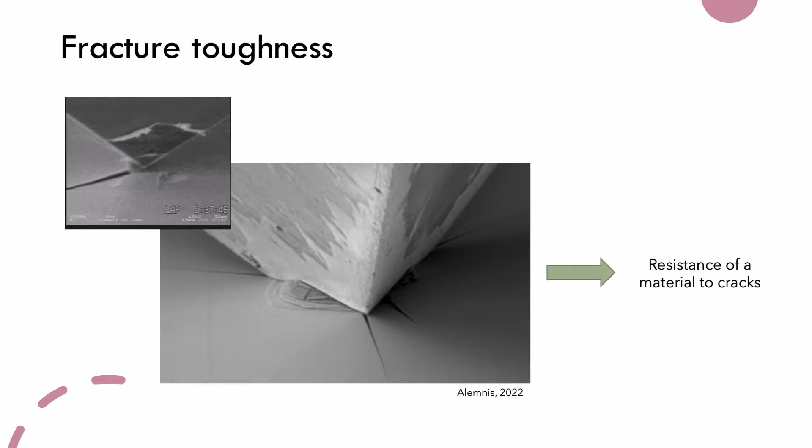Fracture toughness is an essential characteristic of a structural material, indicating the resistance of a material to cracks and governed by the work needed to destroy a biomaterial, also called work of fracture.

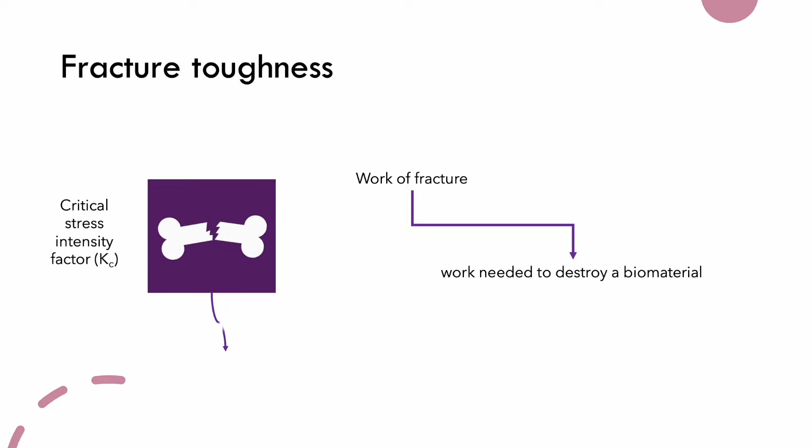The fracture toughness is measured by the critical stress intensity factor, Kc, and critical strain energy release rate, G. The fracture toughness properties of materials vary over a wide range, about 5 orders of magnitude.

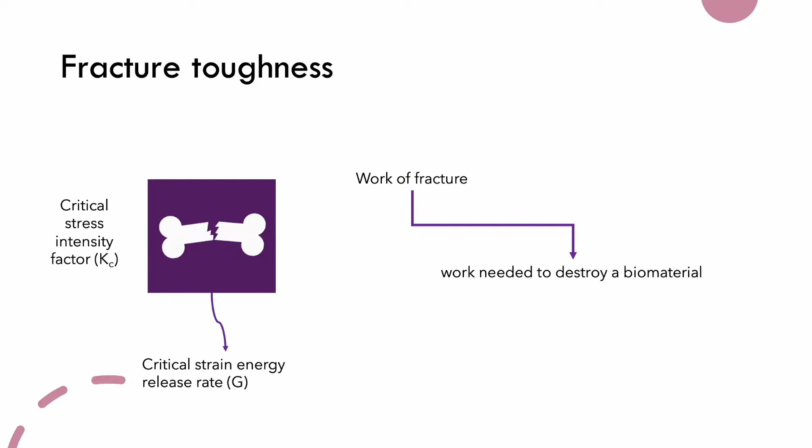High fracture toughness in metals is generally achieved by increasing the ductility, but this often comes at the expense of lower yield strength.

The fracture toughness of metals and other ductile materials depends on their thickness. The toughness is highest when plane stress conditions exist at the crack tip. This occurs when the material is thin, typically less than several millimeters.

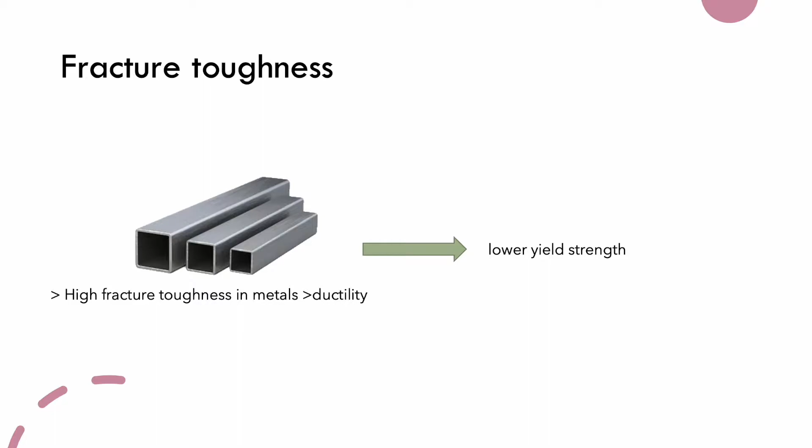The fracture toughness of metals can be improved without significant loss in strength in several ways, including minimizing the impurity content, reducing the grain size, and reducing the amount and size of intermetallic particles at the grain boundaries.

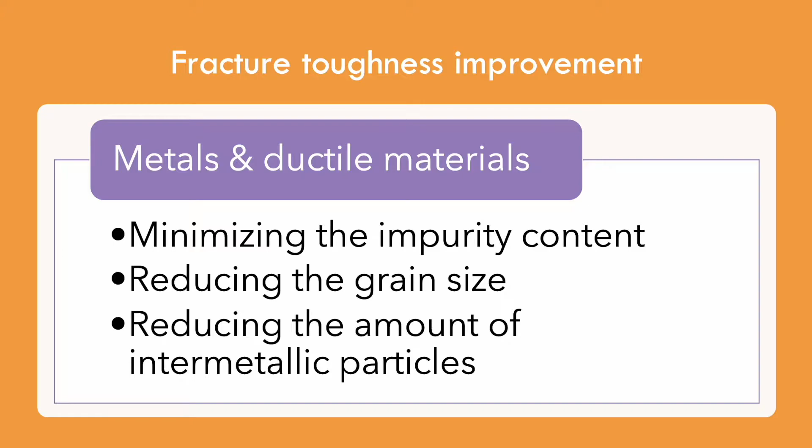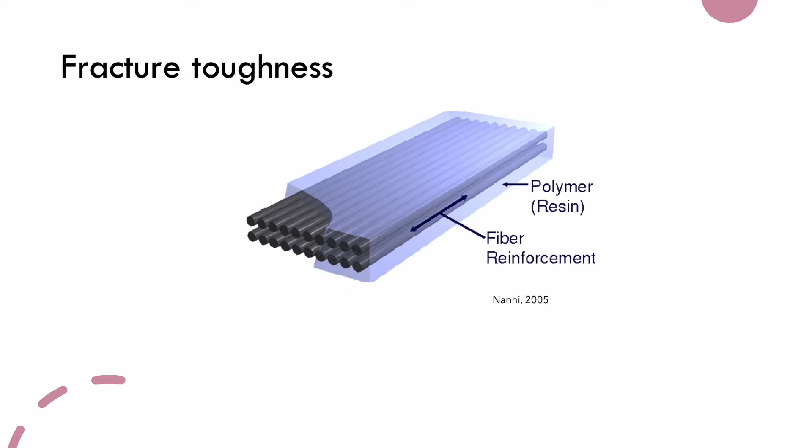The fracture toughness properties of fiber polymer composites are anisotropic. In this case, the highest fracture resistance occurred with an in-plane fracture involving breakage and pullout of the fibers. Conversely, the lowest fracture resistance occurs by interlaminar cracking.

In addition, the fracture toughness properties of wood and metals with a directional grain structure are also anisotropic.

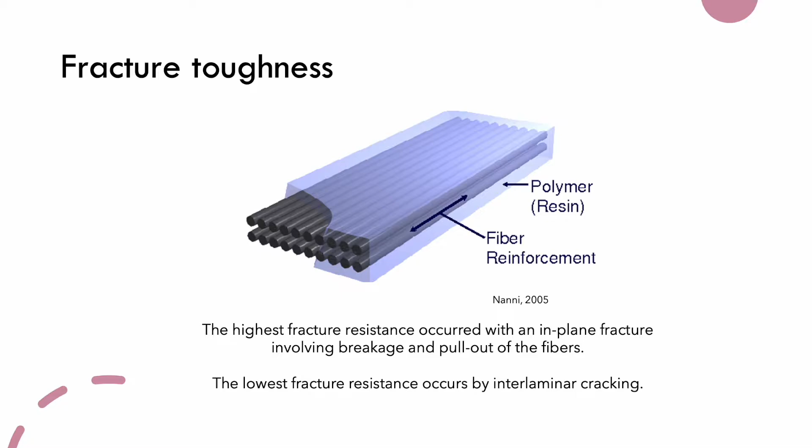The fracture toughness of fiber polymer composites can be improved by using toughening resins, thermoplastic interleaving, through thickness reinforcement by stitching, pinning, or orthogonal weaving, as well as other processes.

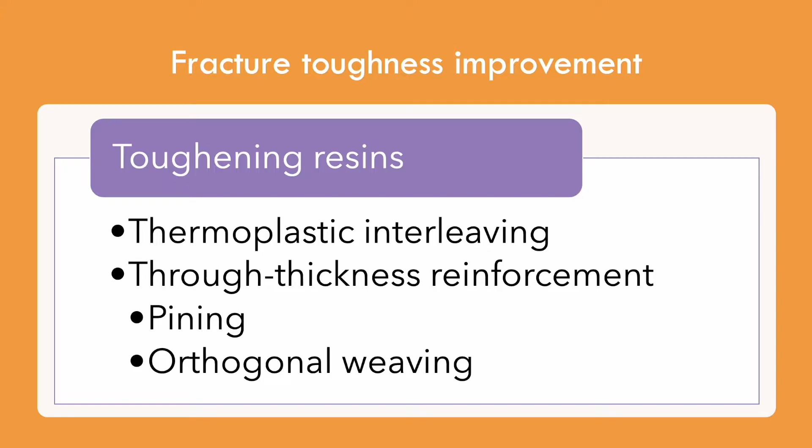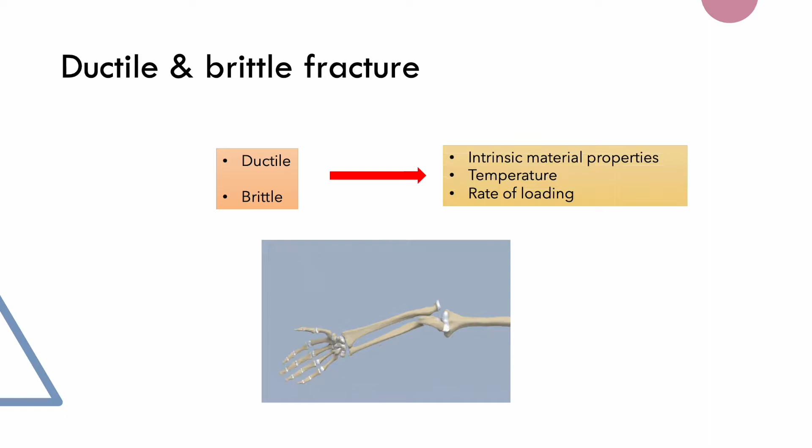As we mentioned, there are 2 types of fractures: ductile and brittle. In this case, the brittle fracture occurs through the crack propagation mechanism.

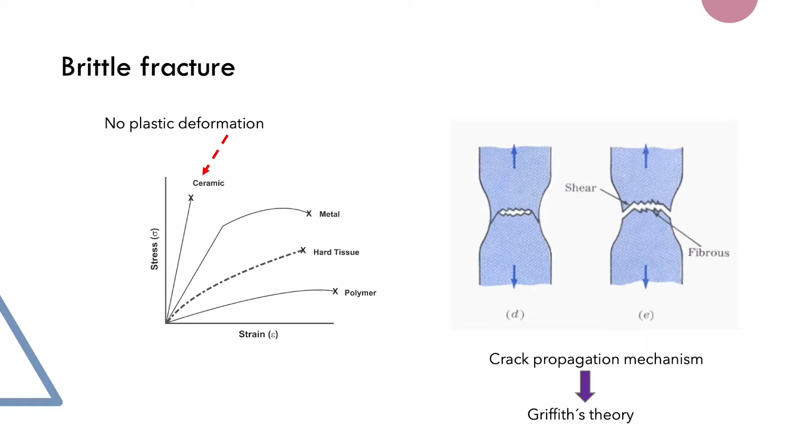In the 1920s, Griffith postulated that most materials contain inherent flaws in the form of microscopic voids or cracks. These flaws serve as points of stress concentration or as stress risers.

Consequently, the applied stress is magnified at the tips of these flaws, and the degree of stress amplification increases as the radius of the tip of the flaw decreases.

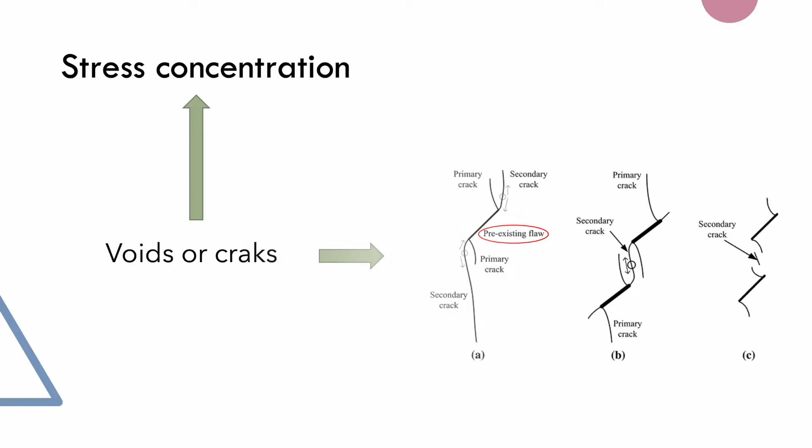Thus, the sharper the crack, the higher will be the stress.

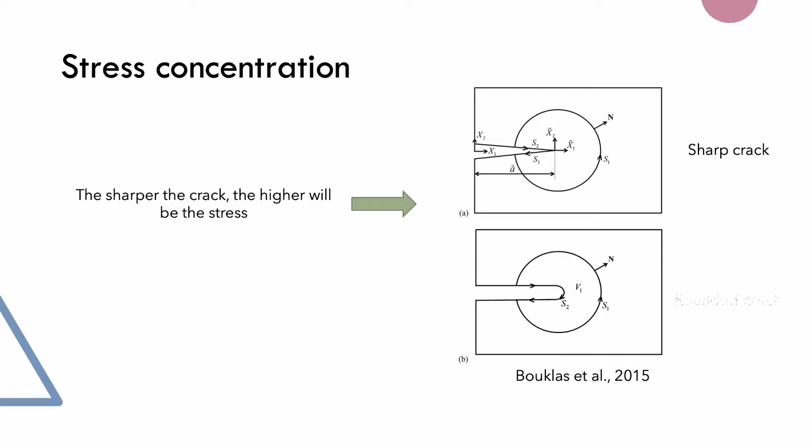As a crack propagates during fracture, it has a sharp tip which causes a stress concentration and high stress ahead of the crack.

In the case of a ductile material, this stress causes plastic deformation of the material at the tip, thus blunting the crack and reducing the stress.

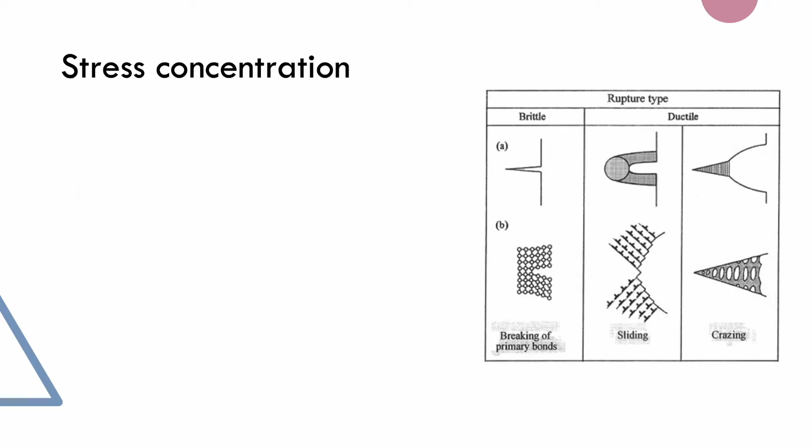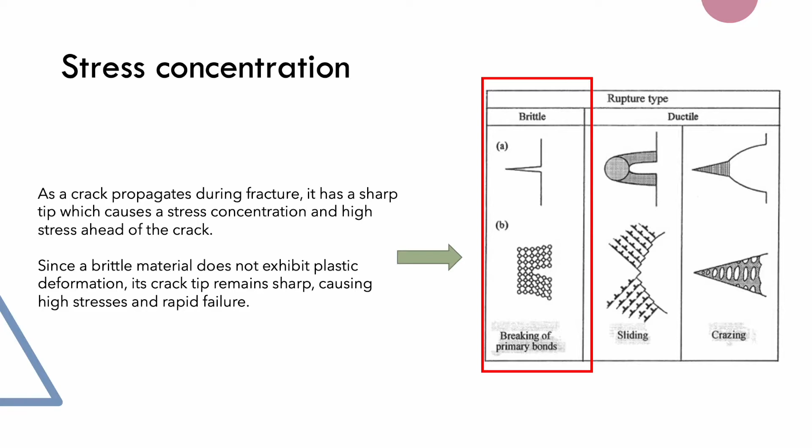However, since a brittle material does not exhibit plastic deformation, its crack tip remains sharp, causing high stresses and rapid failure. Brittle materials are usually stronger under compressive loading than other loading modes because the crack tips are compressed, decreasing the crack propagation rate. Regarding the toughness measurements, it is essential to note that the toughness of brittle materials depends on the test technique employed.

These techniques are classified into long crack and short crack methods. Long crack methods consist of single-edge notched beam, SENB, and single-edge V-notched beam, SEVNB, techniques.

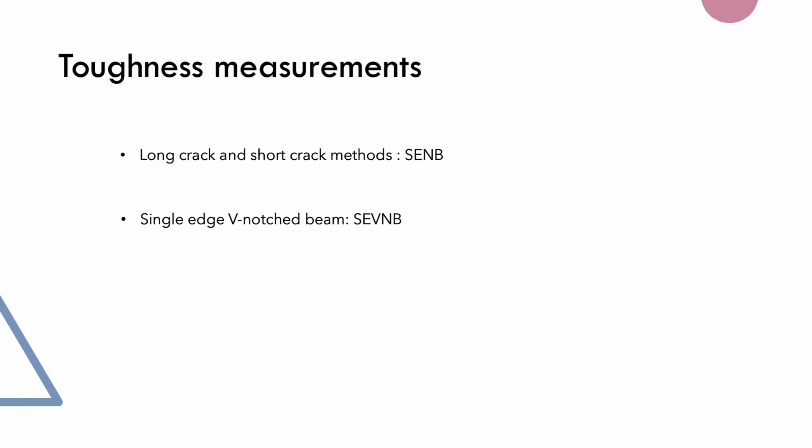In general, the stress distribution near a flaw can be described in terms of the stress intensity factor, K. This factor helps to determine the stress at any point situated at a distance, r, and at an angle, theta,

from the crack tip. In the following equation, we can see the relationship between stress, the crack length, and Y related to the specimen's geometry.

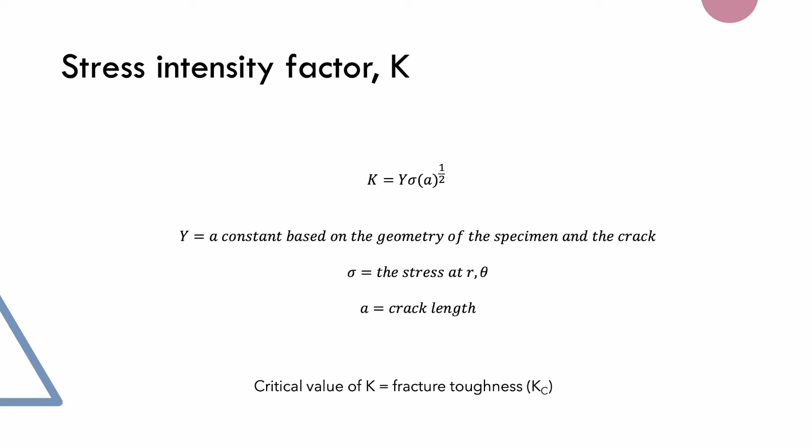On the other hand, the single-edge V-notched beam technique is a modified version of the SENB technique. A sharp V-notch is produced by polishing the notch root with a razor blade coated with diamond paste.

The notch radius can be made smaller than 10 micrometers by polishing. The samples are fractured using a 4-point bending setup on a universal testing machine.

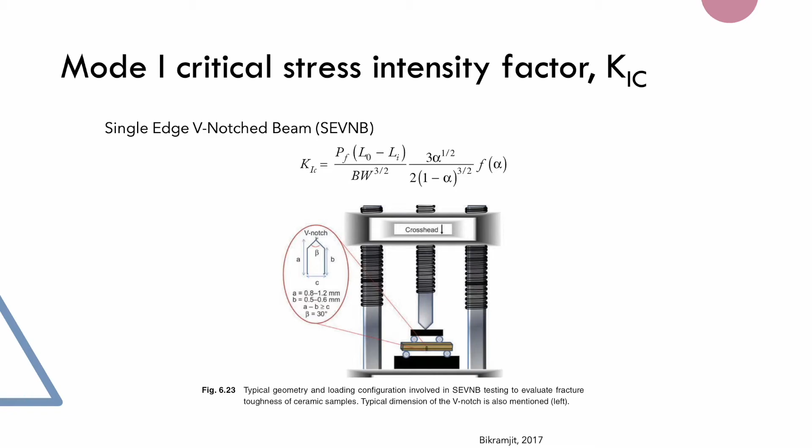Then the fracture load is recorded, and fracture toughness can be calculated from the following equation. PF, Lo, Li, B, and W are fracture load, outer span, inner span, specimen width, and specimen depth, respectively.

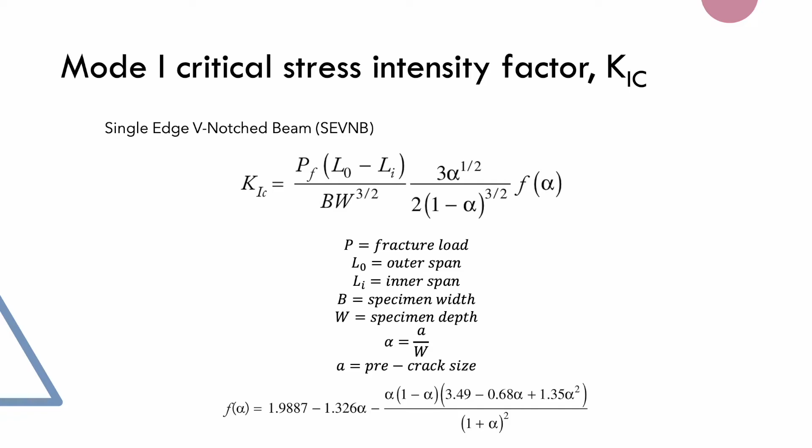Since the fatigue test results are an essential basis for assessing life expectancy and strength of materials, as well as components or structures under cyclic load.

Fatigue failure has several stages. The first stage of fatigue-induced failure is crack initiation.

Cracks usually initiate either at existing sites of stress concentration or as the result of an increase in the number of dislocations within the crystal structure of the material, which leads to imperfections and crack formation.

The cyclic nature of the stress causes the crack growth to occur intermittently, with propagation occurring every time the material is loaded.

The third stage is the final fracture, which occurs when the crack grows to a critical size and the critical stress intensity factor is reached.

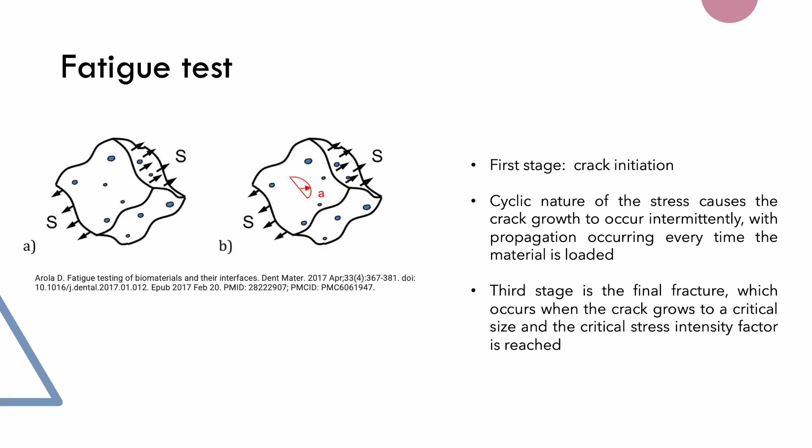Thus, fatigue life is defined as the number of loading or stress cycles of a specified character that a specimen sustains before failure of a specified nature occurs.

As you can see in the following figure, the fatigue properties of a material are graphed as stress versus number of cycles to failure. Historically, the SN curve has been expressed in the form of an exponential relationship between applied stress sigma and number of cycles to failure, NF.

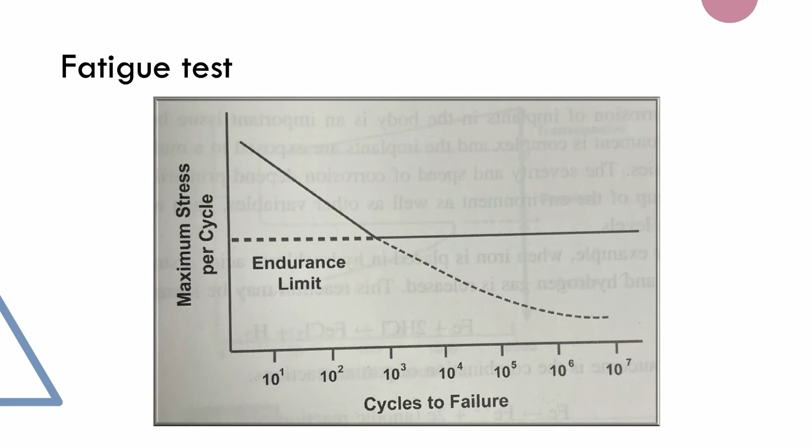In most materials, there is a minimum stress level below which fatigue failure does not occur irrespective of the number of loading cycles. This stress level is known as the endurance limit, and the SN plot becomes horizontal at this point.

The number of cycles is related to engine speed. Therefore, it can be converted to equivalent durability hours.

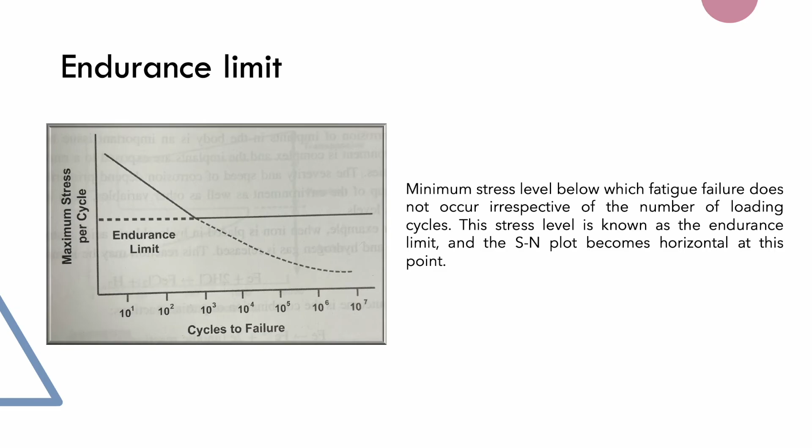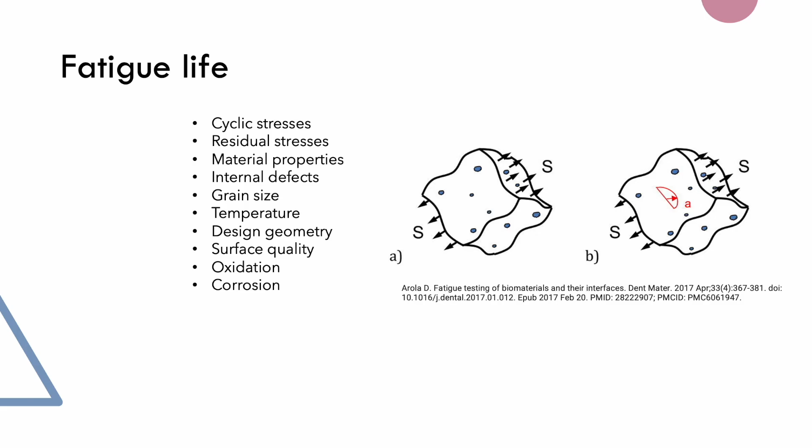Fatigue life is affected by cyclic stresses, residual stresses, material properties, internal defects, grain size, temperature, design geometry, surface quality, oxidation, corrosion, etc.

As we see in this lecture, as biomaterials are fashioned into useful devices or implants, it is important that during the design process, their behavior under operating conditions is carefully predicted and deemed to be safe and efficacious.

By using a standard test to measure biomaterial properties, one can predict how the material will behave to a large degree, thus minimizing the risk of failure in use. This is the basis of all engineering design and is essential.